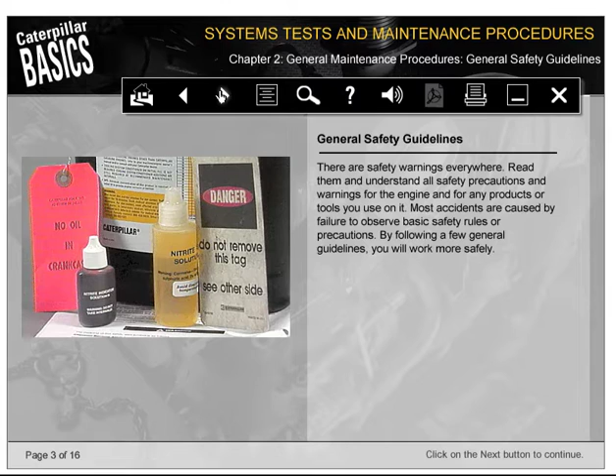If you use a tool, procedure, or operating technique that is not specifically recommended, make sure that it is safe for you and others and will not damage the equipment. Caterpillar cannot anticipate every possible situation that might involve a potential hazard. Use your best judgment to ensure that your actions will not injure you, others, or damage the equipment.

There are many things you can do to protect yourself and others from injury. First and foremost, become familiar with the safe job practices and safety equipment requirements for the work you are performing. If you do not know what they are, ask for help.

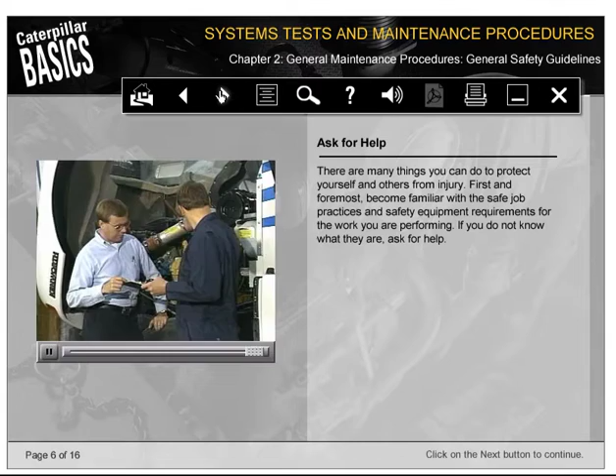There are several protective devices such as safety glasses, rubber gloves, steel-tipped shoes, earplugs, hard hats, and aprons that may need to be worn depending on the work location. Be familiar with the safety equipment requirements for the work area.

Some chemicals used with engines can be hazardous. Battery acid, for example. Become familiar with the hazardous chemicals used in your work area and know what personal safety devices you should use when working with them.

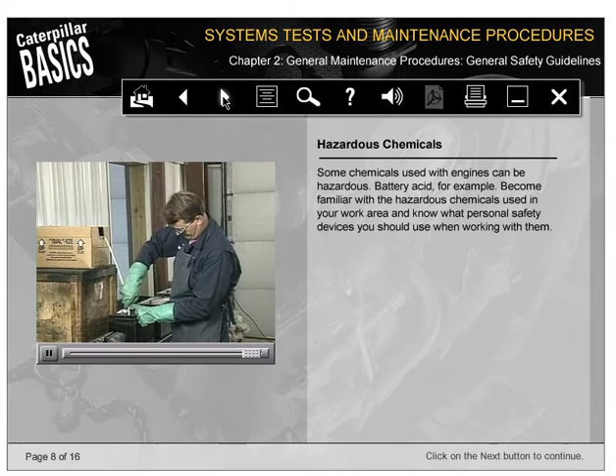Mines, construction sites, and other hazardous or noisy work areas may require special safety equipment. Gloves to protect your hands, hard hat and steel-toed boots to protect your head and feet, and earplugs to block out the loud noise. Always use the protective devices appropriate for the job you are doing.

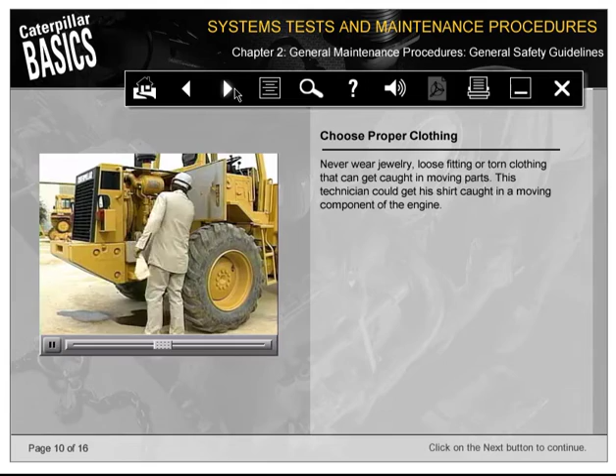Never wear jewelry, loose-fitting or torn clothing that can get caught in moving parts. This technician could get his shirt caught in a moving component of the engine.

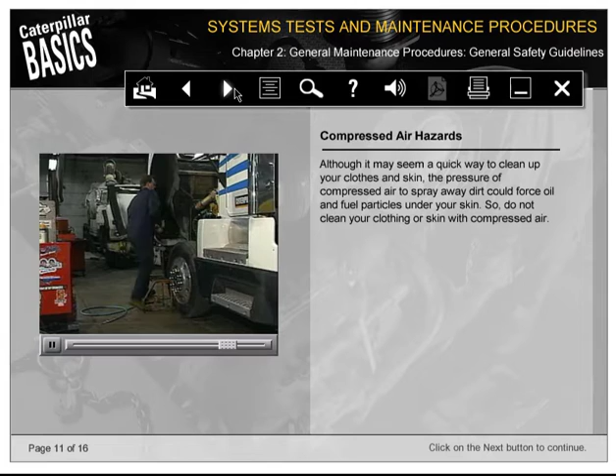Although it may seem a quick way to clean up your clothes and skin, the pressure of compressed air to spray away dirt could force oil and fuel particles under your skin. So do not clean your clothing or skin with compressed air.

Remove rings before doing mechanical work because they can get caught in moving parts and can short-circuit electrical connections and cause severe burns.

Always use recommended procedures and equipment when climbing on and off of machinery.

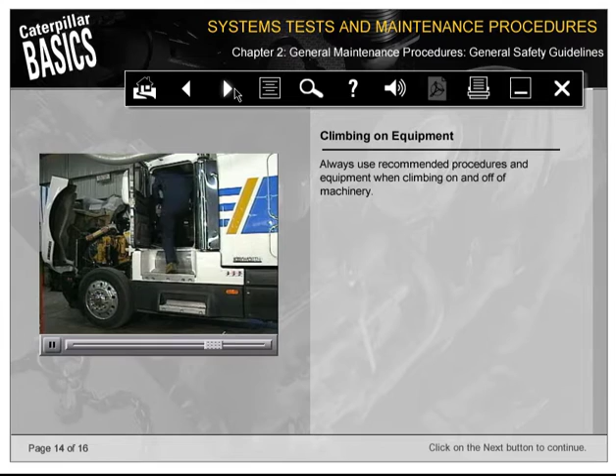You can protect yourself from injury by using good work habits. Be careful around the engine. If you get a hand or finger caught when moving heavy components, you could really hurt yourself. It's also easy to slip and fall when climbing on or off machinery.

In this segment, you will learn about safe and unsafe work environments. You'll also learn the procedures and guidelines required to prepare the engine for a service procedure.

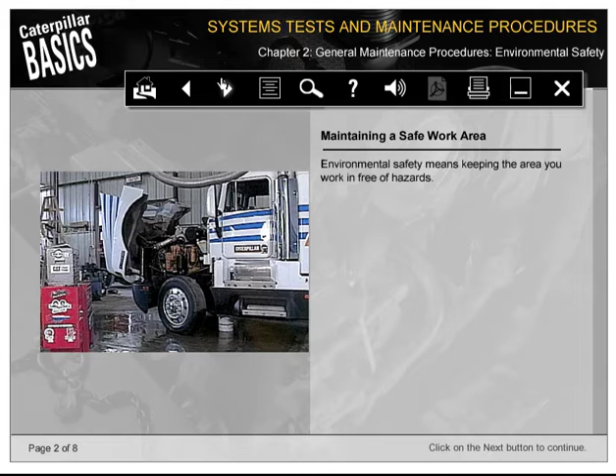Environmental safety means keeping the area you work in free of hazards. Keep your work area well ventilated to minimize exhaust fumes. If you have permanent exhaust systems, use them to vent fumes outside.

Clean up any spills immediately to prevent contaminating the environment or causing injury to someone who might slip on them. Put working tools and equipment in their proper place.

If the engine is in a truck, block the wheels. If the engine is used in some other type of equipment, block or stabilize hydraulic and mechanical systems.

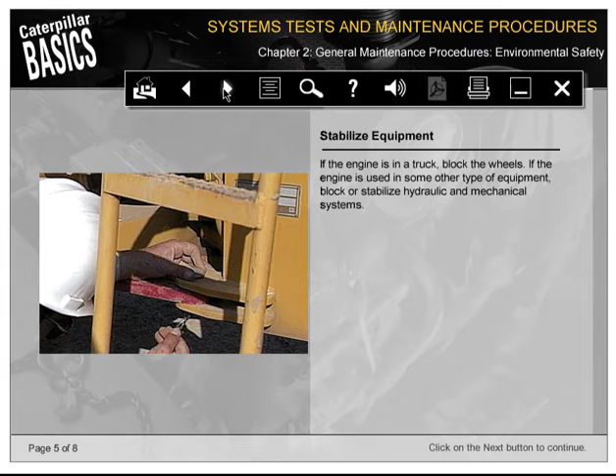Put warning tags on the engine and in the operator's compartment. Tag the steering wheel so that it's clear that work is in progress and that no one should try to start the engine.

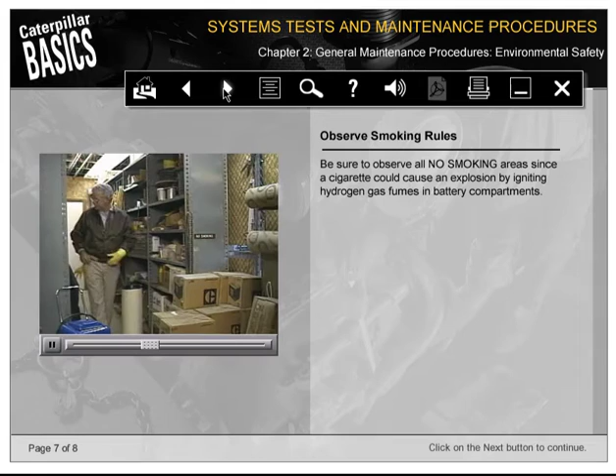Be sure to observe all no-smoking areas, since a cigarette could cause an explosion by igniting hydrogen gas fumes in battery compartments.

In this segment, you will learn the common safety precautions which should be followed before performing any service procedure. You'll also learn the proper test procedures for safely checking pressurized systems and working on a diesel engine.

Because some diesel engine systems generate high pressures and temperatures, special precautions are necessary to prevent injuries. Always follow the service manual procedures for the specific engine. Although there are some exceptions, almost all service procedures should be done on a cool engine.

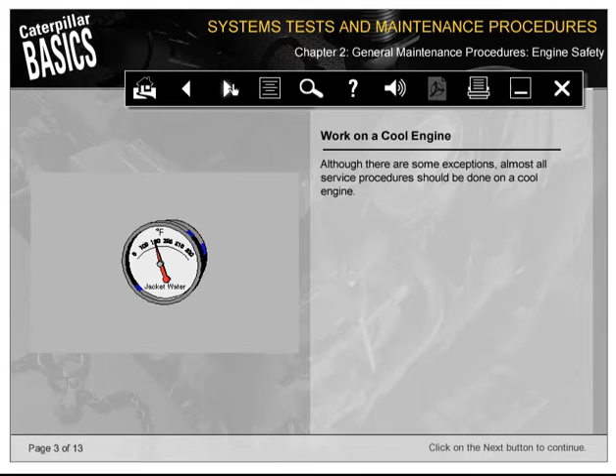Batteries should be disconnected and isolator switches turned off before starting work to prevent accidental starts and components shorting out. It also protects you from burns and shocks.

Never use your bare hand to check high-pressure fuel lines for leaks. Fuel under pressure can pierce your skin and cause blood poisoning. Use a shop towel to help test for leaks in pressurized systems. Wipe the suspect fitting and watch for leaks from a safe distance.

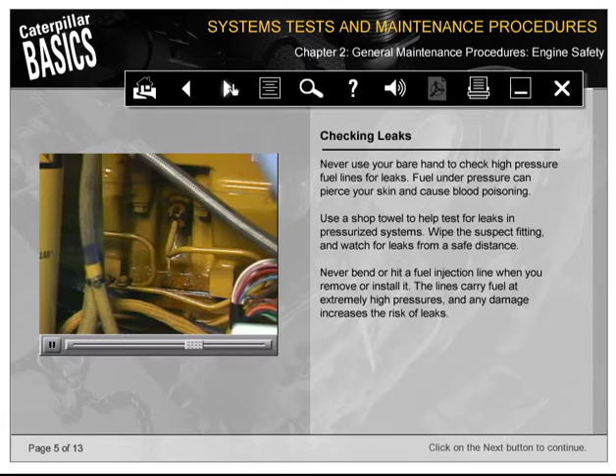Never bend or hit a fuel injection line when you remove or install it. The lines carry fuel at extremely high pressures, and any damage increases the risk of leaks.

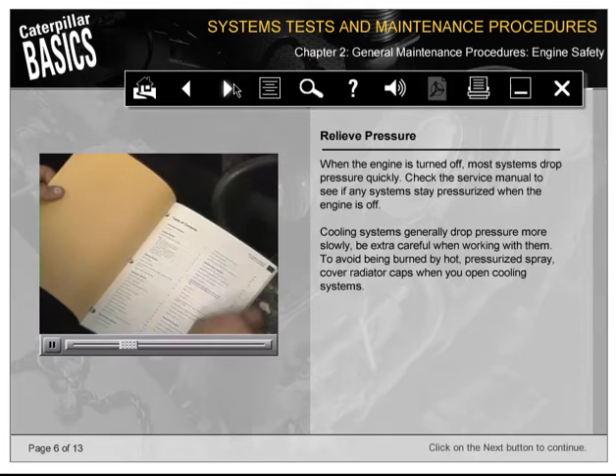When the engine is turned off, most systems drop pressure quickly. Check the service manual to see if any systems stay pressurized when the engine is off. Cooling systems generally drop pressure more slowly. Be extra careful when working with them. To avoid being burned by hot, pressurized spray, cover radiator caps when you open cooling systems.

Follow recommended procedures when using lifting devices. Make sure the chains, hooks, and slings are in good condition.

When using lifting equipment, attach the hooks with the hook ends facing out. When the hook faces out, the load is distributed straight through the chain. This reduces damage to the equipment.

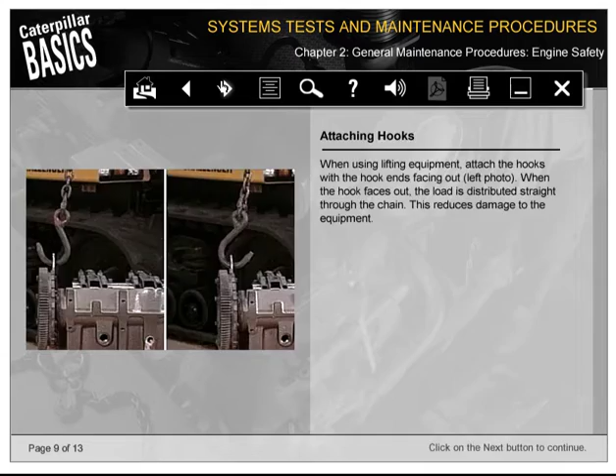Attach hoist chains so they are as perpendicular as possible. The more vertical the chains, the more load they can carry safely.

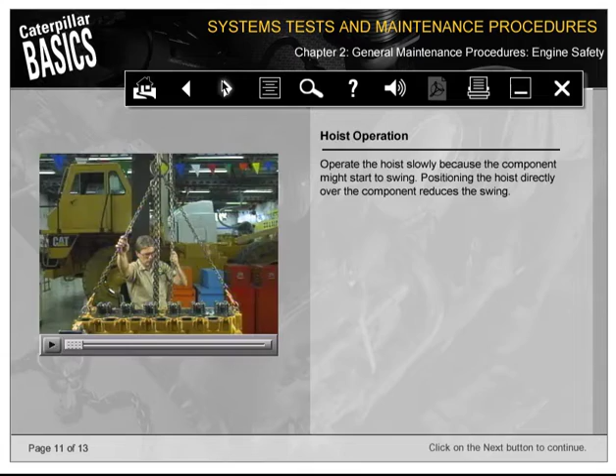Operate the hoist slowly because the component might start to swing. Positioning the hoist directly over the component reduces the swing. Make sure the rated lifting capacity is higher than the load.

After completing this topic, you'll be able to identify engine information plates, identification tags, and service meters, and understand the types of information available from these sources. You'll also be able to conduct a visual inspection of an engine.

In this segment, you will learn how to locate an identification tag and information plate on an engine. You'll also learn to calculate a service interval using hours, miles, and gallons of fuel consumed.

Whenever you service an engine, you should always perform a visual inspection. A visual exam will tell you a lot about the general condition of the engine.

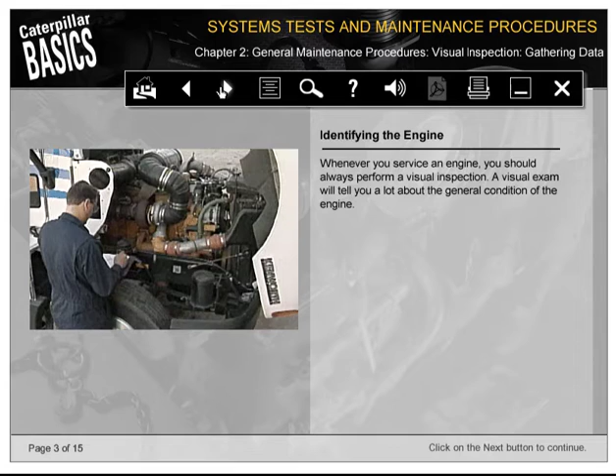On CAT engines, the information plate provides most of the information you will need. Information plates are often located on the intake manifold or valve cover. For the exact location, check the manual.

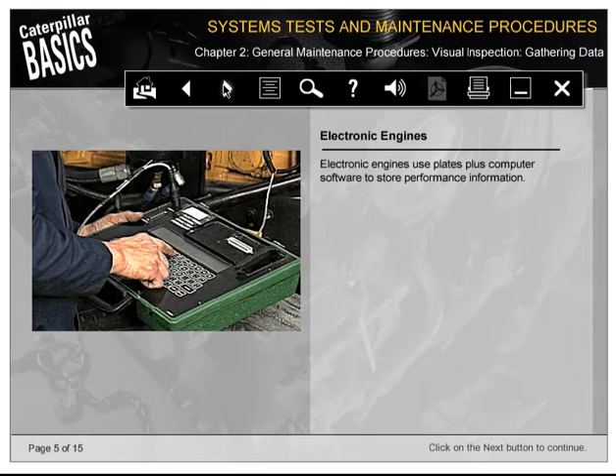Electronic engines use plates plus computer software to store performance information. Every piece of data on the information plate is useful when you service or test an engine.

The serial number is a unique number which identifies each engine. The arrangement number is a 6-digit number used with the serial number to access the Caterpillar parts and ordering system.

Use the performance specification, or 0T number, to access the fuel settings and related information fiche. With the 0T number, you can look up specifications for a particular engine.

In addition to the information plate, the serial number and model number are located on an ID tag on the block. The serial number is also stamped into the block.

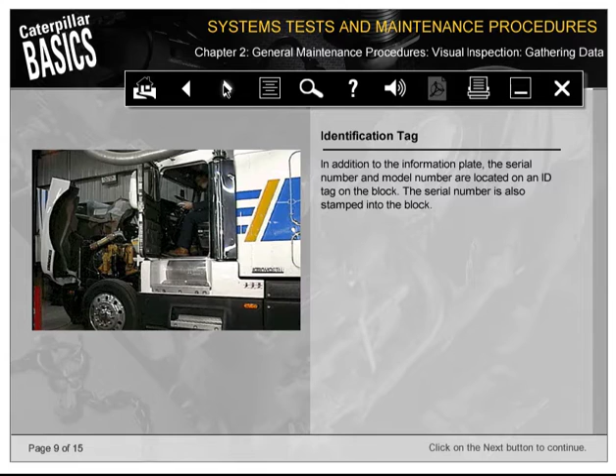Make sure you keep the original information plate. The plate and ID tag must match. Otherwise, you could look up information for the wrong engine.

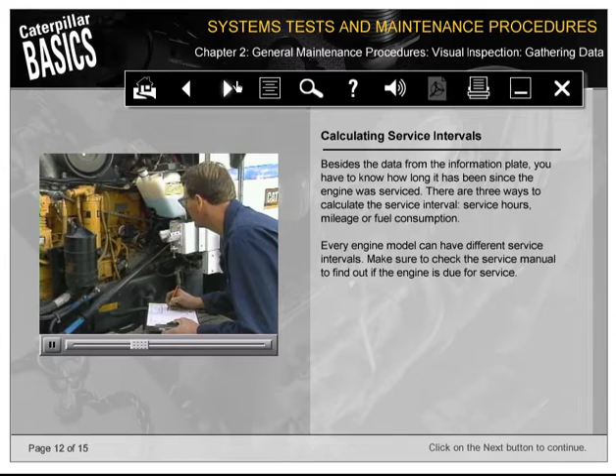Besides the data from the information plate, you have to know how long it has been since the engine was serviced. There are 3 ways to calculate the service interval: service hours, mileage, or fuel consumption.

Every engine model can have different service intervals. Make sure to check the service manual to find out if the engine is due for service.

To calculate the service interval using the fuel consumption technique, add the total gallons of fuel used since the last service. Fuel consumption is the most accurate method to determine the service interval because it compensates for engine load.

You must have accurate operator logs in order to use this method. To calculate the service interval using the mileage method, take the current odometer reading and subtract the previous reading found in the service logs.

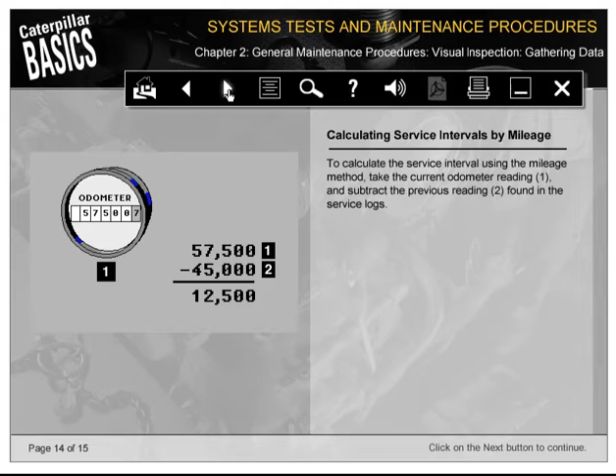In this segment, you will learn the purpose and procedures of a visual inspection. You will learn to identify problem areas when given sample components to inspect, and you will learn the different methods of checking belt tension.

Visual inspections tell you about the general condition of the engine. They help identify engine problems before they become engine failures. You need to perform a visual inspection every time you service an engine.

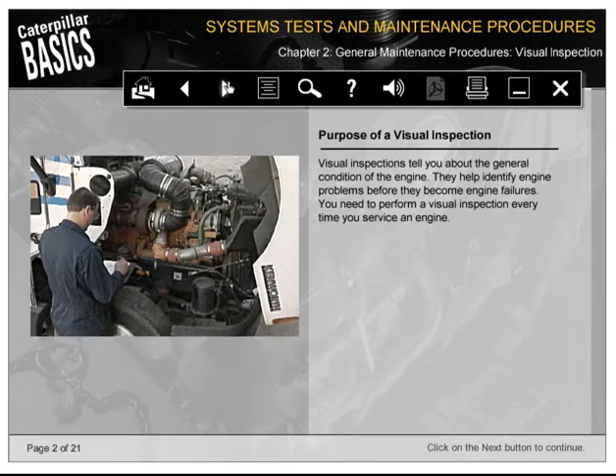When you perform a visual inspection, you will want to do basic operation checks and inspect the engine systems for leaks and other obvious problems. During the inspection, write down any problems you find. Let your service advisor know about major items.

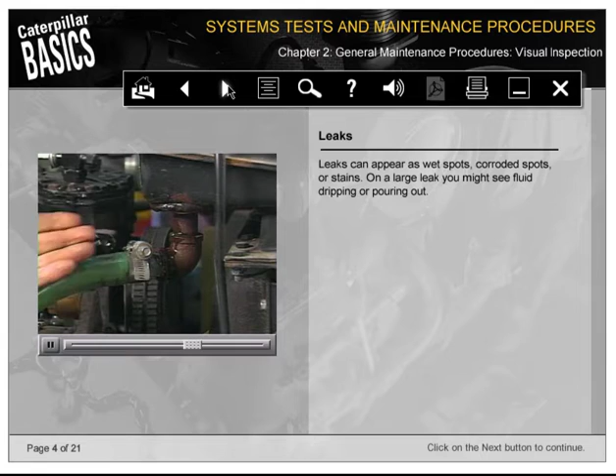Leaks can appear as wet spots, corroded spots, or stains. On a large leak, you might see fluid dripping or pouring out.

Check the battery and case for corrosion, cracks, leaks at the cell covers, and the condition of the posts, connections, terminals, and harnesses. Chalky deposits also indicate a problem.

Check the electrolyte level on regular and low-maintenance batteries. You cannot do this on a sealed battery.

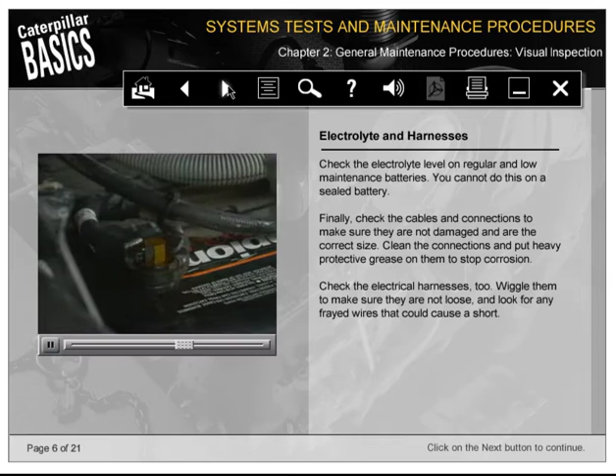Finally, check the cables and connections to make sure they're not damaged and are the correct size. Clean the connections and put heavy protective grease on them to stop corrosion. Check the electrical harnesses too. Wiggle them to make sure they're not loose, and look for any frayed wires that could cause a short.

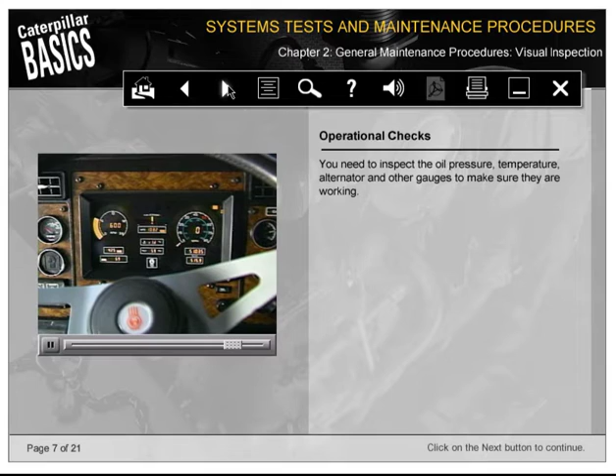You need to inspect the oil pressure, temperature, alternator, and other gauges to make sure they're working. Always check the oil level and condition.

Check all the cooling hoses and clamps. If they feel soft and mushy or hard and brittle, they should be replaced. Twist, pinch, and squeeze the hoses to make sure they're not too soft or too hard. Wiggle the hoses at the connections to make sure they're clamped on tight.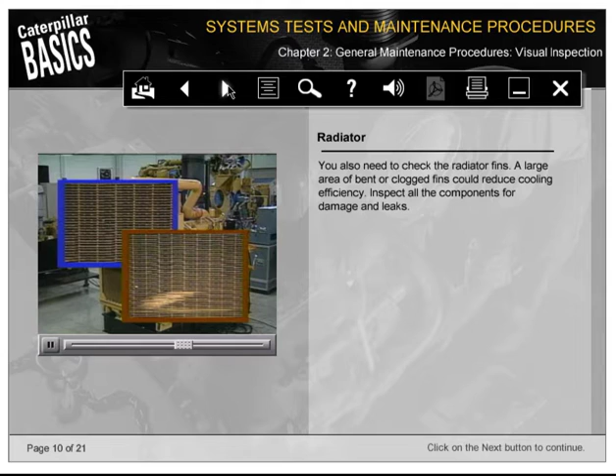You also need to check the radiator fins. A large area of bent or clogged fins could reduce cooling efficiency. Inspect all the components for damage and leaks.

Check the coolant level and also make sure there is no debris or obvious discoloration. Inspect the air intake system for leaks, restrictions, and damaged components.

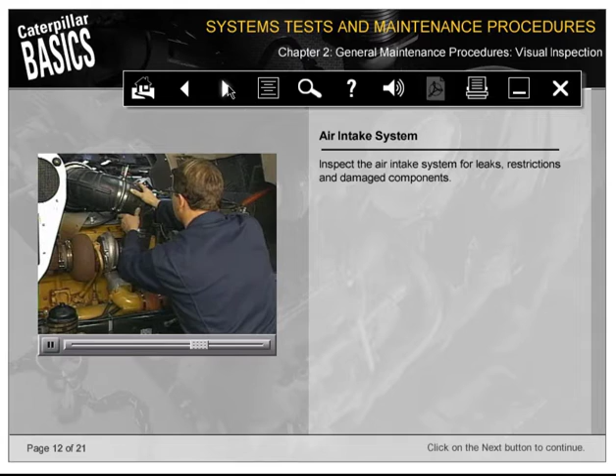Check the fuel system for leaks, bent or dented fuel lines, and missing clamps.

If the engine has belt-driven components, check both the belts and pulleys. Even small cracks and ridges can cause a belt to fail during engine operation. If a belt is worn or loose, components will not turn at the correct speed, which can lead to major engine failure.

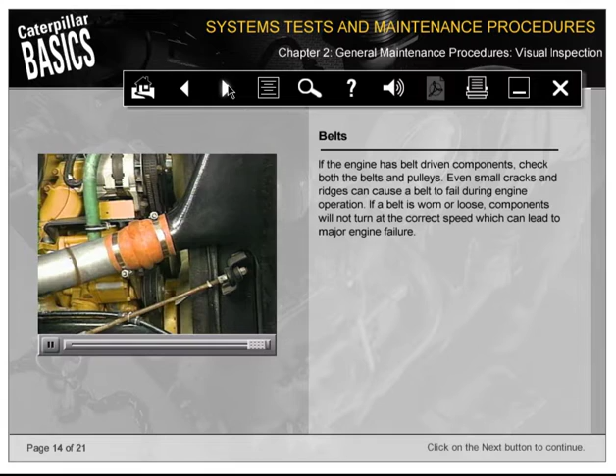If one belt is worn, replace all the belts in the set.

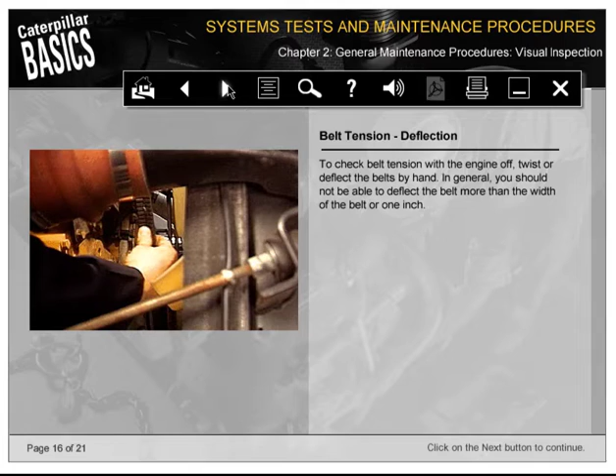To check belt tension with the engine off, twist or deflect the belts by hand. In general, you should not be able to deflect the belt more than the width of the belt, or 1 inch. You can also use a belt tension tool to get an accurate measurement of the belt tension.

While you're checking the belts, inspect the pulleys for wear, cracks, or damage. Pulley grooves should have flat, angled sides. If a pulley has dished sides or other damage, such as cracks, replace it.

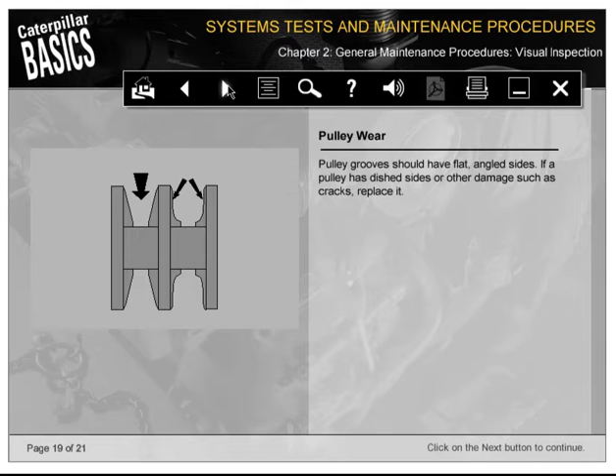The goal of visual inspection is to spot problems before they become failures.

After completing this topic, you will understand the maintenance procedures performed on the oil, cooling, air, and fuel systems, and you will recognize the procedures required to change the oil, air, and fuel filters.

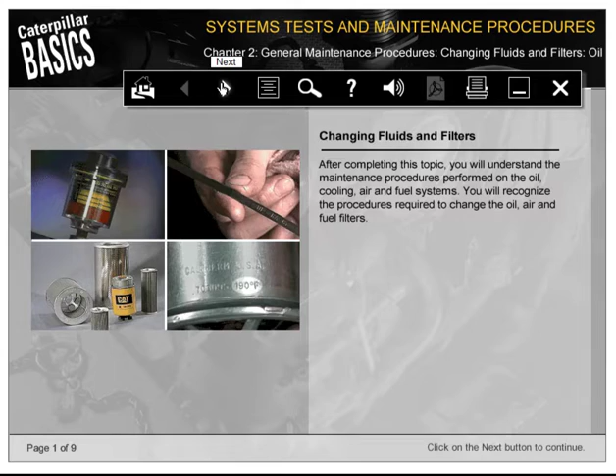In this segment, you'll learn the recommended service interval for changing oil and filters. You'll also learn the steps required to perform the oil and filter change procedure.

Changing the oil, coolant, air, and fuel filters regularly reduces wear and prolongs the life of the engine. Changing the oil and filters at correct intervals helps maintain good oil quality.

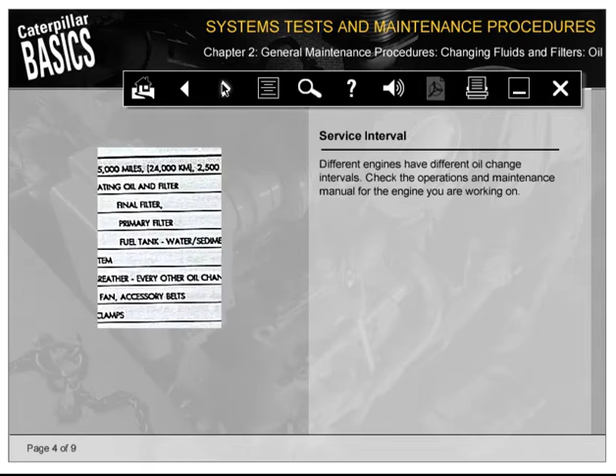Different engines have different oil change intervals. Check the operations and maintenance manual for the engine you are working on. The engine may also require a scheduled oil sample. This procedure is explained in detail in a later topic.

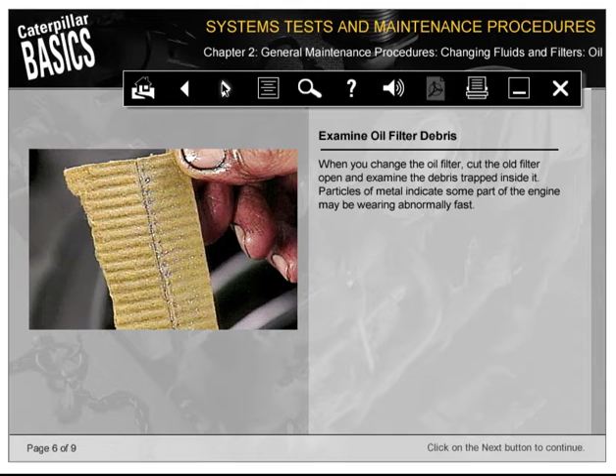When you change the oil filter, cut the old filter open and examine the debris trapped inside it. Particles of metal indicate some part of the engine may be wearing abnormally fast. Large quantities of metal indicate abnormal wear or a pending failure. So if you see this, contact your supervisor.

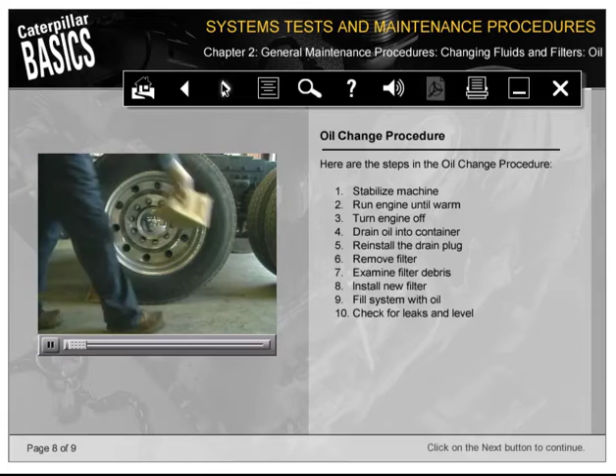Before you change the oil, make sure the equipment is on a level surface and that it is secure and will not roll. Run the engine until it reaches normal operating temperature, then turn it off. This warms up the oil so it drains more quickly and completely.

Remove the drain plug and drain the oil while it is still warm. This removes more debris and suspended dirt from the system. After the oil is drained, replace the drain plugs and tighten them to the recommended torque.

Next, remove the filter with a filter wrench. If there is a bypass filter, remove it too. Cut the filter open and examine the debris trapped inside. If only normal amounts of metal are found in the oil filter, install a new one.

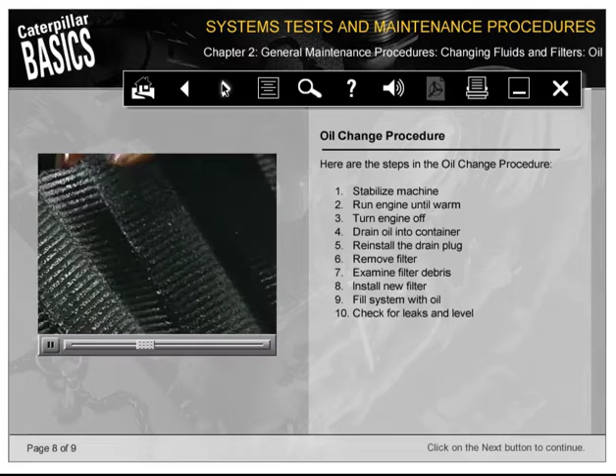Make sure the sealing surface is clean and free of gasket material. Install the recommended filter for the engine. Different models require different sizes and sometimes different types of filters.

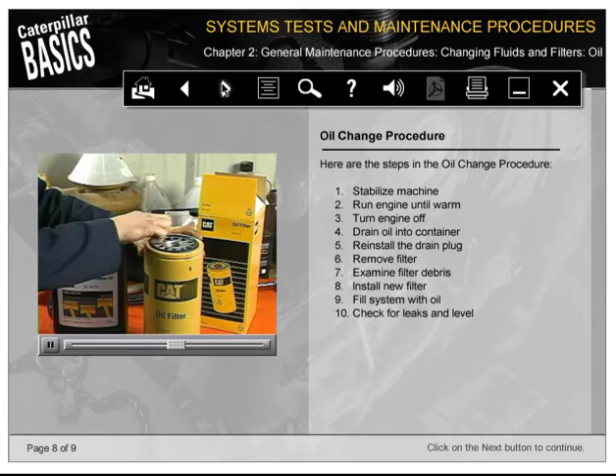Do not put oil in the filter before you install it. That would introduce unfiltered or contaminated oil into the block, which could accelerate wear. Lubricate the filter gasket and then install it. Spin the filter until the gasket contacts the base, then tighten it 3/4 of a turn by hand.

After changing the filters, refill the crankcase with new oil. Check the operation and maintenance manual for the type and quantity of oil. Remember that auxiliary equipment will increase the required volume.

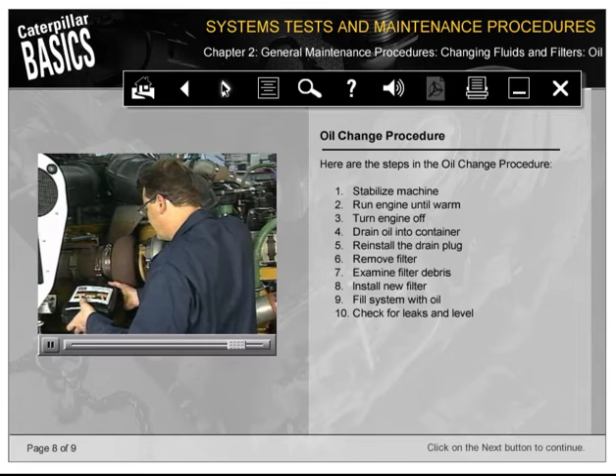Remove the oil filler cap and add the specified volume of new oil. After you fill the crankcase with oil, run the engine at low RPM long enough to circulate the oil and fill the filters. Make sure the oil pressure is normal.

Stop the engine and let the oil drain into the sump. Check for oil leaks. Measure the oil level and adjust it if necessary.

In this segment, you will learn the two methods for adding coolant conditioner and the procedures used for each method. You'll also learn the procedures used to perform routine maintenance on the cooling system and those required for a major service.

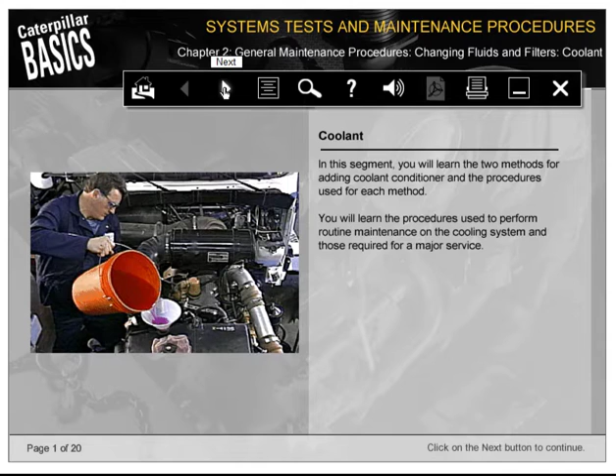Cooling systems have a different maintenance schedule than air, fuel, or oil. There are 4 checks you need to perform on the cooling system: coolant level, coolant appearance, antifreeze concentration, and coolant conditioner concentration.

Cooling systems are pressurized and take a little while to cool off after the engine is stopped. Follow the safety guidelines in your shop before working on the engine. Loosen the radiator cap slowly to depressurize the system.

Always check the appearance of the coolant. Foamy or dirty coolant indicates a leak in the system.

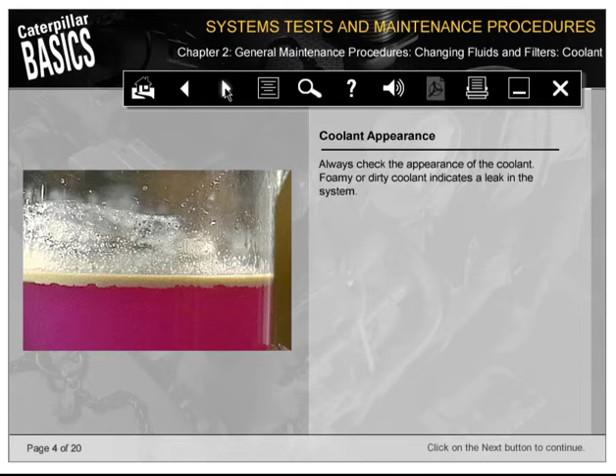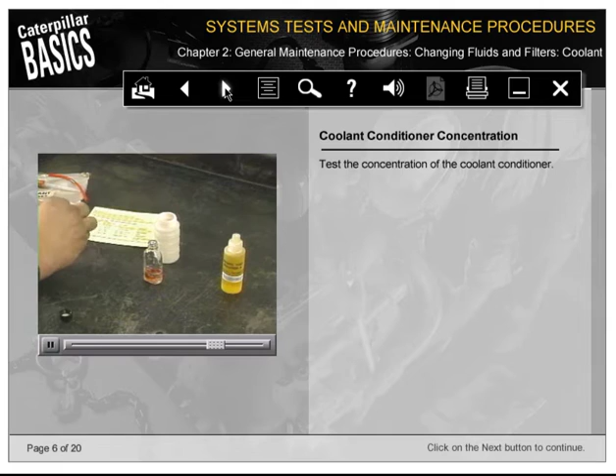Check the antifreeze concentration using the test kit recommended by the manufacturer, and test the concentration of the coolant conditioner.

If you have to add coolant, make sure it is the proper mix of water, antifreeze, and conditioner. There are 2 methods to add coolant conditioner: a spin-on element or liquid conditioner.

To change the coolant conditioner element, turn off the engine and let it cool. Turn off the inlet and outlet valves and loosen the conditioner element. Clean the gasket or seal and install the new element, tightening it until the gasket meets the base, then turn it 3/4 of a turn more by hand.

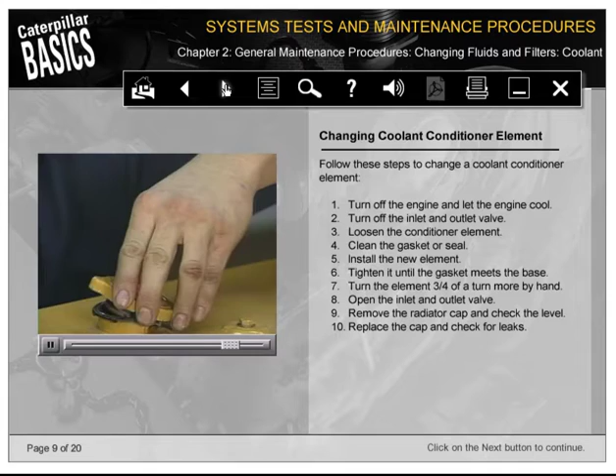Open the inlet and outlet valve. Remove the radiator cap and check the level, then replace the cap and check for leaks.

If the engine does not have a coolant conditioner element, add liquid coolant conditioner to the filler pipe, following the manufacturer's instructions for the correct amount.

Excessive coolant conditioner creates silica dropout, which can turn the coolant into a thick gel that blocks the coolant passages. Conditioner should not exceed 6%.

After inspecting the coolant, check the radiator cap. If the gaskets are worn or damaged, replace the cap.

A major cooling system service requires 4 procedures: flushing the coolant, testing the regulator, cleaning the cooling system, refill and test.

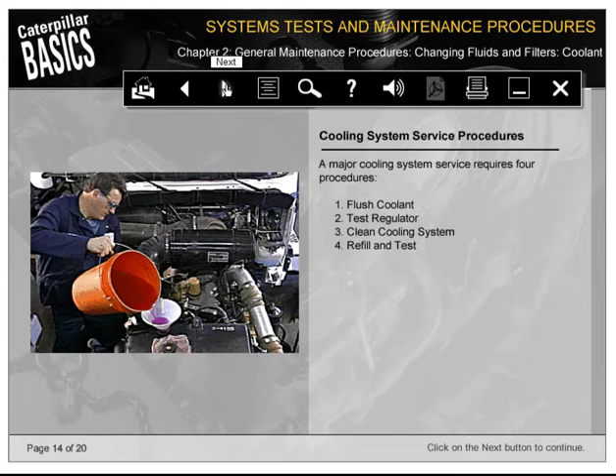To flush the coolant, turn off the engine and let it cool. Make sure the batteries are disconnected.

Remove the drain plug or open the drain valve, using an approved container for disposal or recycling. If the equipment has a cab, open the valve to flush coolant from the cab heater.

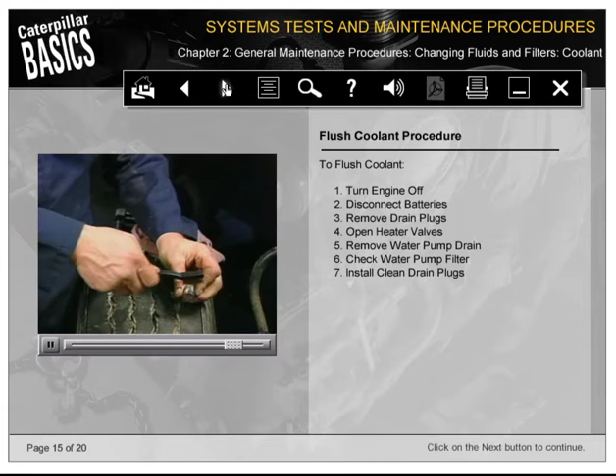If there is a drain plug on the bottom of the water pump, remove it. Check the water pump breather filter for blockage or debris. Clean all the drain plugs before you install them, and use sealant if recommended.

To get to the regulator, remove the regulator housing and manifold from the cylinder head. Open the housing and remove the regulator and seal.

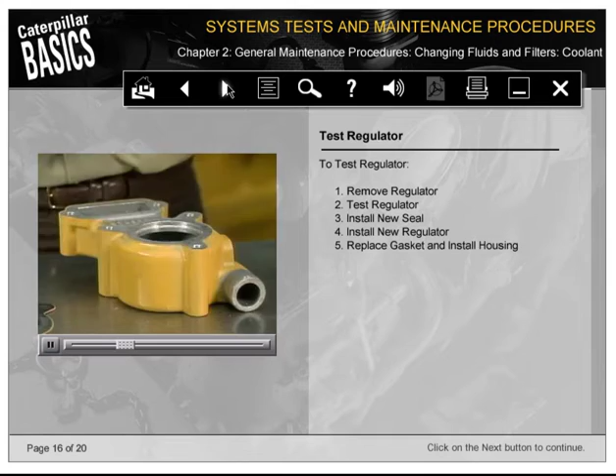If the regulator is damaged or has heavy deposits, replace it. Otherwise, test the regulator, and if it meets reusability standards, reuse it.

Install a new lip-type seal into the housing. If necessary, install a new regulator. Replace the gaskets and install the regulator housing. Reconnect the hoses and torque all connections to manual specifications.

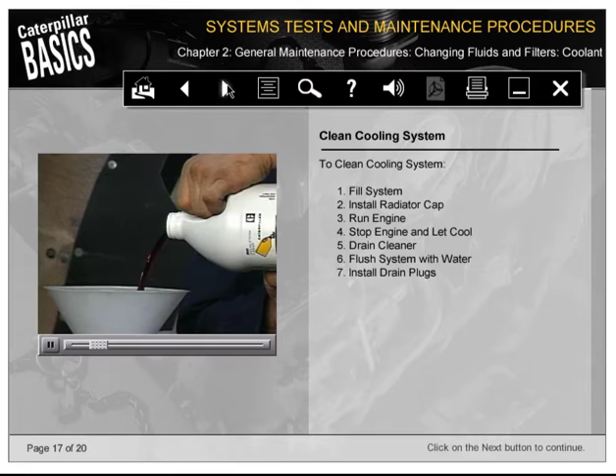First, fill the system with clean water and cooling system cleaner, following the manufacturer's instructions to mix the solution. Install the radiator cap and run the engine for the length of time specified by the manufacturer.

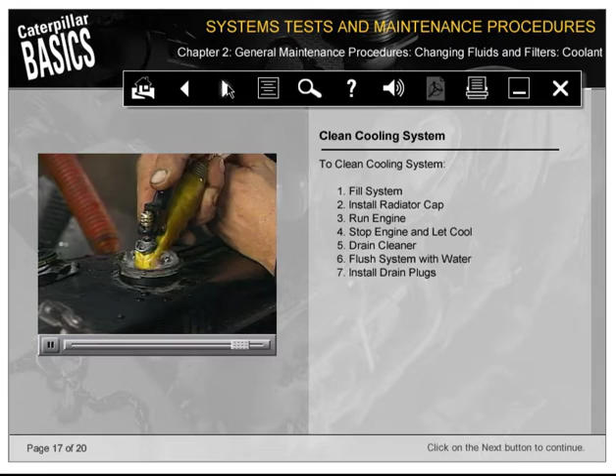Then stop the engine, let it cool, and drain the cleaning solution into an approved storage container. Flush the system with water until it runs clear, capturing the water with an approved recycling container. Clean and install the drain plugs.

Refill the system with pre-charged coolant, no faster than 5 gallons per minute. Once the cooling system is filled, start the engine and run it without the radiator cap. After the engine is warm, check the coolant level and add more if needed.

Turn the engine off. Inspect and test the radiator cap, replacing it if necessary. Install the cap and restart the engine, then check for leaks and proper operating temperatures.

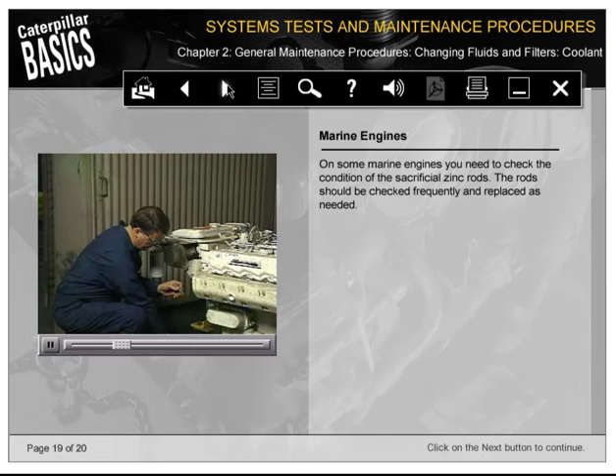On some marine engines, you need to check the condition of the sacrificial zinc rods. The rods should be checked frequently and replaced as needed.

In this segment, you will learn how to locate and identify an air filter indicator and an air filter on an engine. You'll be able to determine whether the air filter should be changed based on an air filter indicator.

Basic air intake service includes inspecting and cleaning the pre-cleaner and the air inlet pipes. Air filters are replaced as needed.

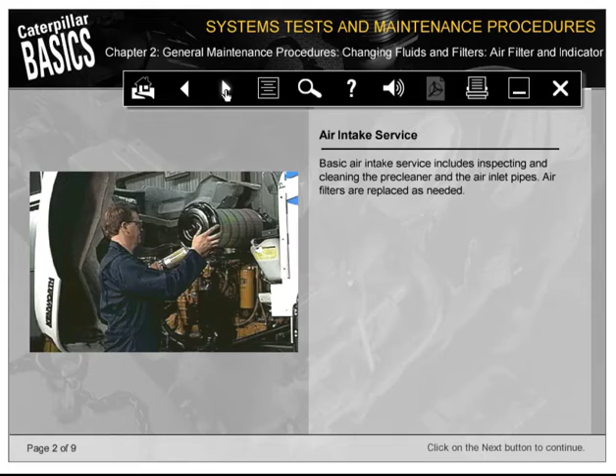Many engine performance problems stem from a dirty air filter. Symptoms such as black smoke, low power, or excessive fuel consumption could indicate a problem with the air filter. There are several types of air filters.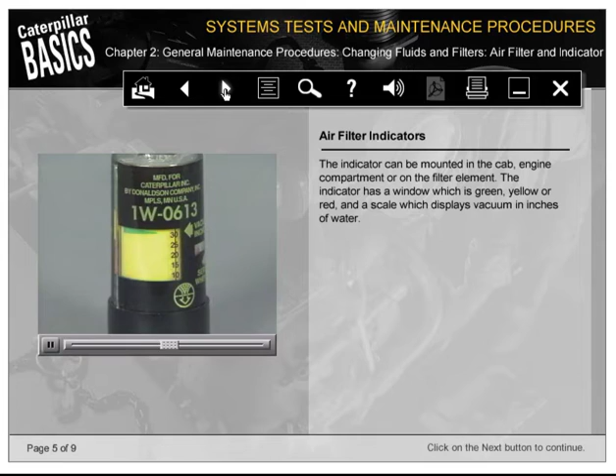The indicator can be mounted in the cab, engine compartment, or on the filter element. The indicator has a window which is green, yellow, or red, and a scale which displays vacuum in inches of water.

As the filter gets dirty, less air flows through it. This increases the vacuum inside the indicator, which causes the diaphragm and piston to move. When the piston enters the maximum restriction area, it is time to change the air filter.

For engines without an air filter indicator, the operating conditions dictate how often the filter should be serviced.

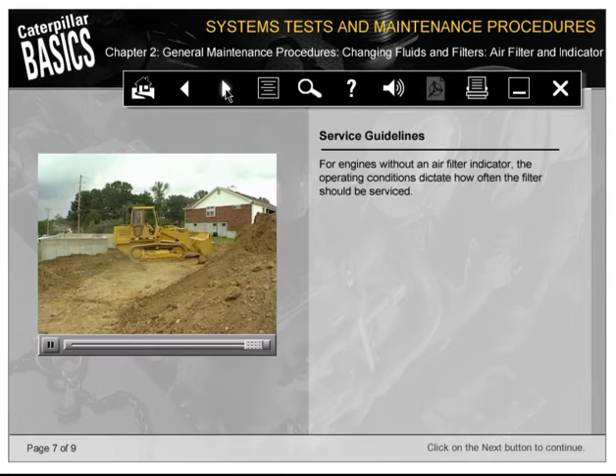Before you service the air system, make sure the engine is off. This is for your own safety and also keeps unfiltered air out of the engine. If there is a pre-cleaner, empty and clean it and the inlet pipe. Unbolt the filter element from the base and cover the air inlet pipe to keep the interior of the engine clean. Remove the element and clean the housing.

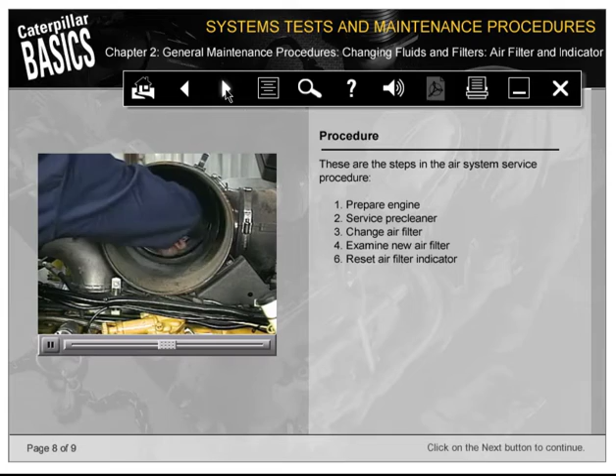After you clean the air intake system, install a new filter. Make sure it is in good condition. Use a light inside the filter to help check for rips and tears; you'd be able to see the light through any holes. Install the new filter and tighten the connections. Finally, reset the air filter indicator by pressing the reset button if it has one.

In this segment, you will learn to identify primary and final fuel filters on an engine. You'll also learn the procedures used for cleanable and replaceable fuel filters.

Fuel systems require regular maintenance to ensure clean fuel is delivered to the engine. Servicing the fuel system requires several steps: you have to check for water, change the filter, and prime the system to remove air.

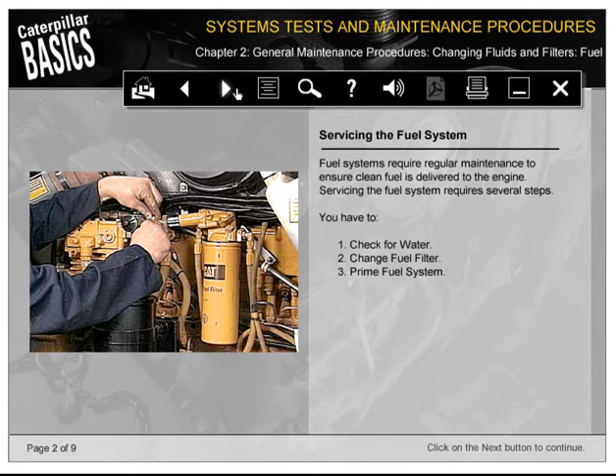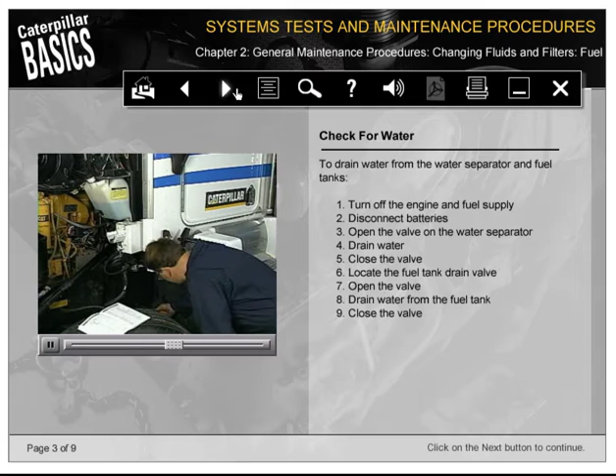Before you begin, turn the engine off and disconnect the batteries. Turn off the fuel supply if the machine has a manual shut-off valve. Before you can drain the water, check the service or OEM manual for the location and type of water separator. Once located, open the valve and drain any water present. Drain water from the fuel tanks as well, checking the service manual for the exact location and procedure.

After draining the water from the fuel system, change the primary and final fuel filters. Primary filters are normally located between the tank and transfer pump. The final filter is usually located fairly close to the fuel pump. Do not fill new fuel filters with fuel when you install them, since this introduces unfiltered fuel into the engine, which could cause damage. Primary fuel filters are available in both cleanable and replaceable styles. Final fuel filters are always replaced.

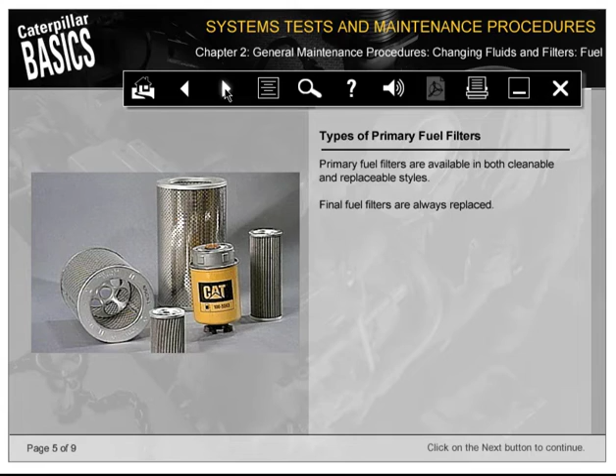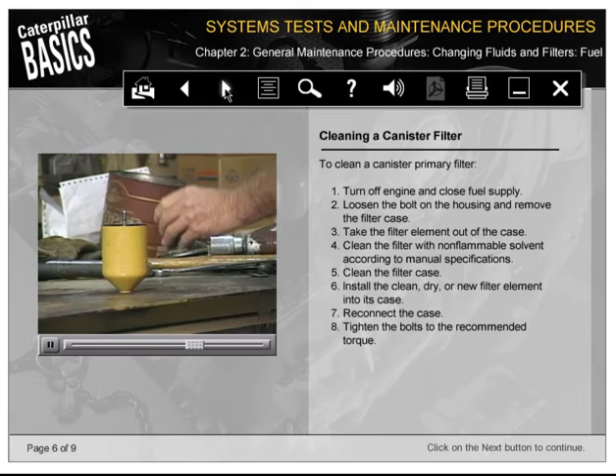To clean a canister primary filter, loosen the bolt on the housing and remove the filter case. Take the filter element out of the case and clean it with non-flammable solvent. Follow the recommended procedure in the manual and remember to clean the case as well. Install the clean, dry, or new filter element into its case. Reconnect the case and tighten the bolts to the recommended torque.

To change a spin-on element, remove the element and clean off the surface of the filter base, making sure all the old gasket material is removed. Replace the filter with the type and size recommended in the service manual. After you encounter resistance, tighten the filter another 3/4 of a turn by hand. Replace a spin-on final fuel filter the same way. After changing both filters, open the manual fuel supply valve. If the engine has a fuel shutoff solenoid, this step is not necessary.

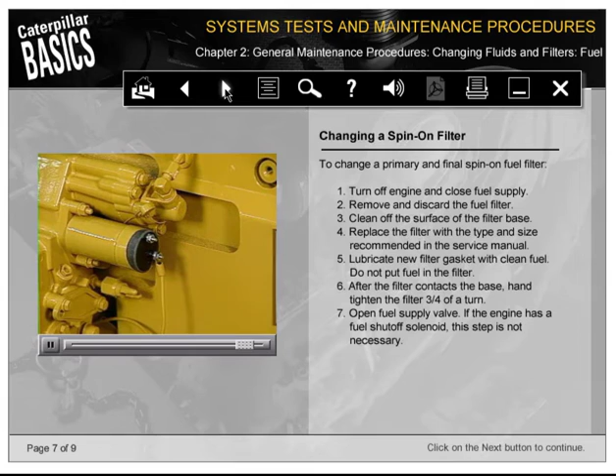The last step you may have to perform is priming the fuel system to remove air bubbles. The priming pump is usually located on the final fuel filter. Unlock it and operate the pump until you feel resistance, meaning the filter is full of fuel. Then lock the priming pump. In most cases, this is all you need to do, and the engine normally starts.

In this segment, you will learn when a scheduled oil sample should be collected and learn the two preferred sampling sites for an engine oil sample.

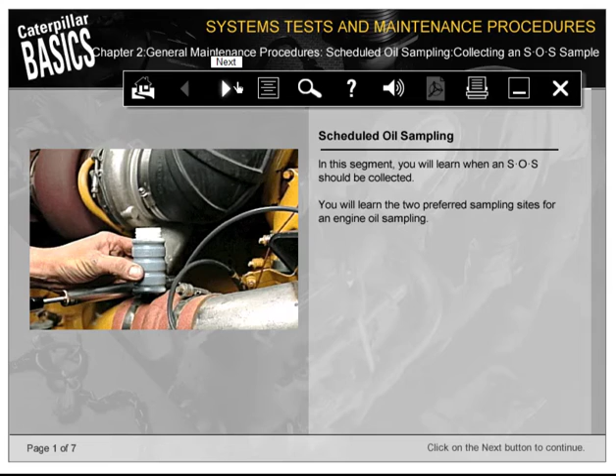Scheduled oil sampling, or SOS, provides valuable wear trend information that can tell you about major engine problems before they cause engine failure. An SOS sample should be collected at every oil change. The engine should be warm to ensure that wear materials are suspended in the sample.

There are two recommended sampling sites: the dipstick port and the oil sample port, the arrow on the engine. Use clean sampling equipment, since dirty tubes or bottles contaminate the sample and give inaccurate results.

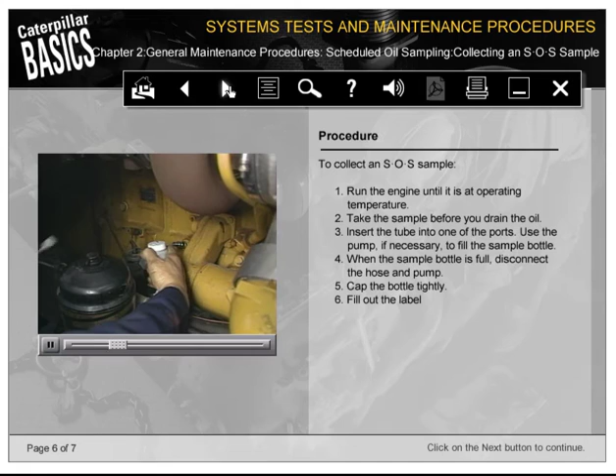To collect a sample, insert the tube into one of the ports. Use the pump if necessary to fill the sample bottle. When the sample bottle is full, disconnect the hose and pump, then cap the bottle tightly. The sample is the first step.

Next, fill out the mailing label completely for the lab to perform the analysis. You will need data from the service order, information plate, operator log, and the odometer.

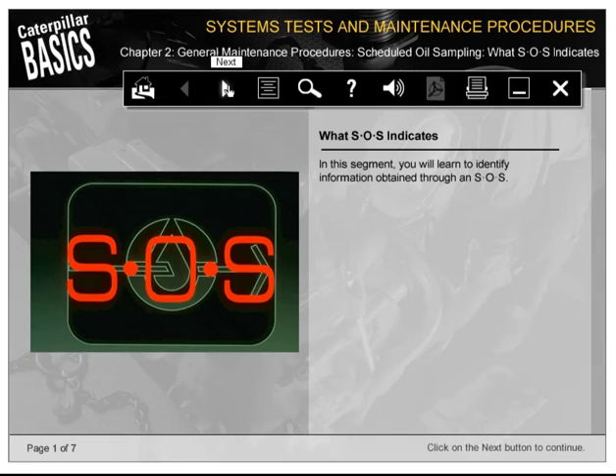In this segment, you will learn to identify information obtained through a scheduled oil sampling.

An SOS report is a picture of the overall health of the engine. The SOS has three types of tests: wear analysis, chemical and physical tests, and oil condition analysis.

Wear analysis reveals components that might be wearing faster than normal. Chemical and physical tests detect the presence of water, fuel, and coolant in the oil. An oil condition analysis determines the presence and amount of contaminants such as soot, sulfur products, oxidation, and nitration products.

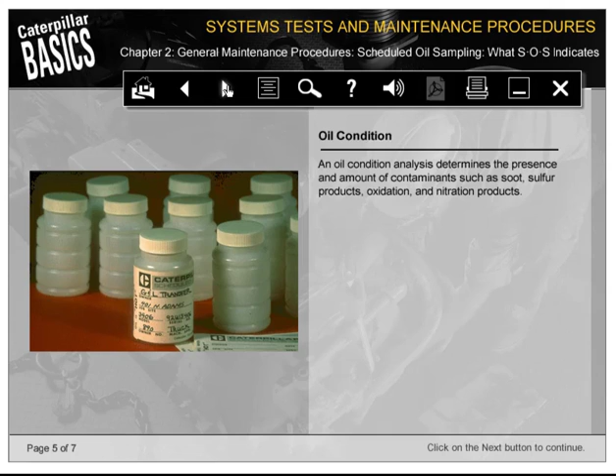Reading an SOS is quite easy since the report is divided into five sections: owner information, an oil history, wear materials, chemical and physical tests, and oil condition results.